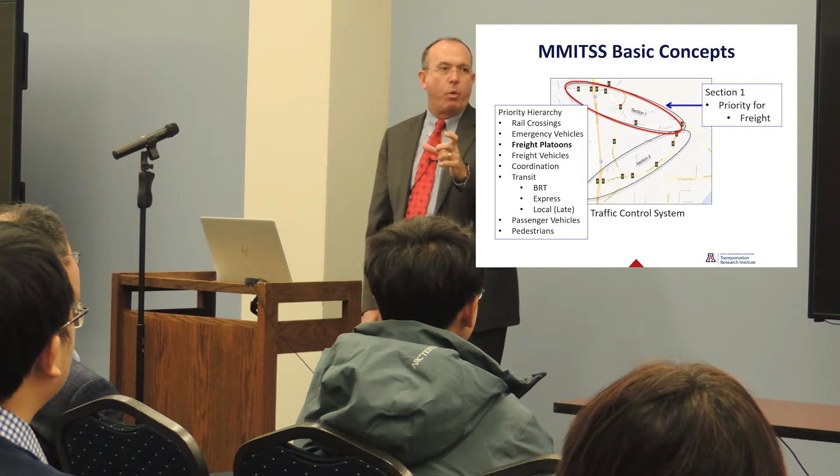I really care about my emergency vehicles getting to where they're going safely and quickly, but in this corridor I have a lot of warehouses and I'm going to move a bunch of freight through there. Maybe I'm going to move it as platoons or maybe as vehicles, right? But I want you to give preferential treatment to them at the traffic signals, and then maybe I want you to coordinate the signals, and then we have a little bit of transit that goes through there because people come and go to work at certain times of the day and we want them to use the transit, and then passenger vehicles, and we don't have many pedestrians.

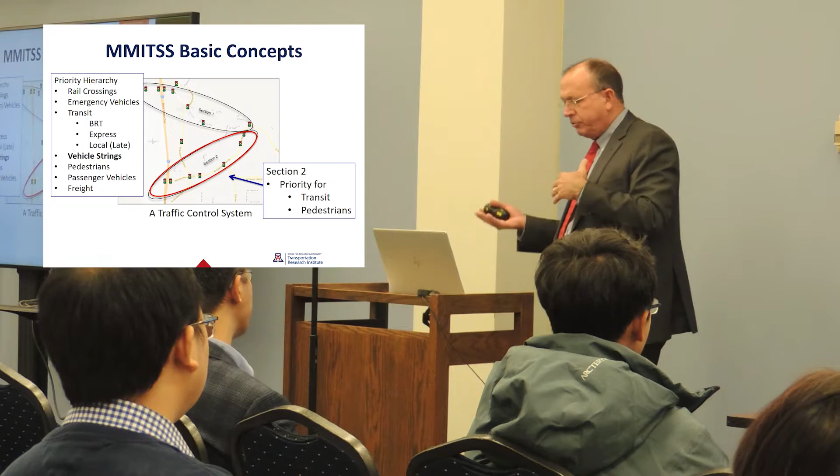But this other section on the other side, maybe this is where there's lots of shopping and schools and activities where there's lots of pedestrians and transit, and we really want to make it a travel-friendly environment, somewhere where they feel comfortable hopping on a bus and going a few blocks and getting off, and so the pedestrians and transit, and maybe we want to favor BRT at certain times of the day, and maybe if there's groups of vehicles that get together in strings, we want them to flow through the signals, because we could adapt the signals to do that, and then maybe pedestrians and passenger vehicles, and finally freight. So we can change the order of the hierarchy that's there.

And the other thing that's really important in the connected vehicle world, and you guys see this here all the time, is we can finally measure performance in ways we've never thought of, right? And we can do all the traditional things, volume, delay, travel time, throughput, stops, and such. Those are all exciting. We can do it by mode, by movement. So if we have a heavy movement of trucks making a left turn and their flow rate is pretty slow, we can actually assess that that's going on. That would impact how much time we want to give that phase, all right?

So first of all, use connected vehicle data. So we do that, basic safety messages, MAP, signal request message, signal status message, and SPaT data. Then do things that you did with adaptive control that's called ISIG. So go back to the RT-TRACS program and the RHODES and OPAC and COP algorithm that you guys are studying, and use those. And Yiheng, a shout out to you, he really modified the COP algorithm to work for 8-phase intersections or more general intersections.

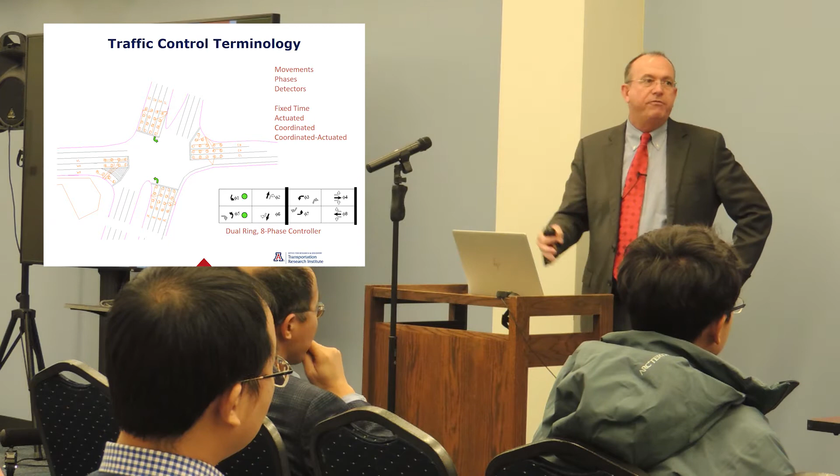There's a barrier down the middle that says you can't cross the barrier unless both rings go at the same time because you're moving to the conflicting phases of traffic. So we're going to jump the barrier and go to the left turns that are on the other side. We're going to time those phases for a while for whatever reason. Maybe one of them moves on and maybe the other one moves on. And then we're going to repeat the process all over again.

And that's really the core of how a traffic signal works. There's lots of things related to coordination and other stuff that go on top of it. But if you understand this part, the core is really there.

Each one of the phases has a few complications. First of all, there's a minimum green time. Traffic engineers don't like short mins. This is what happens if you have a really short min: you turn the light green, 2 seconds later you turn it yellow, and one car gets rear-ended by the other. Right? Because the one car says, yellow, I can stop, I barely started moving. So we have to have a certain amount of minimum green time for safety.

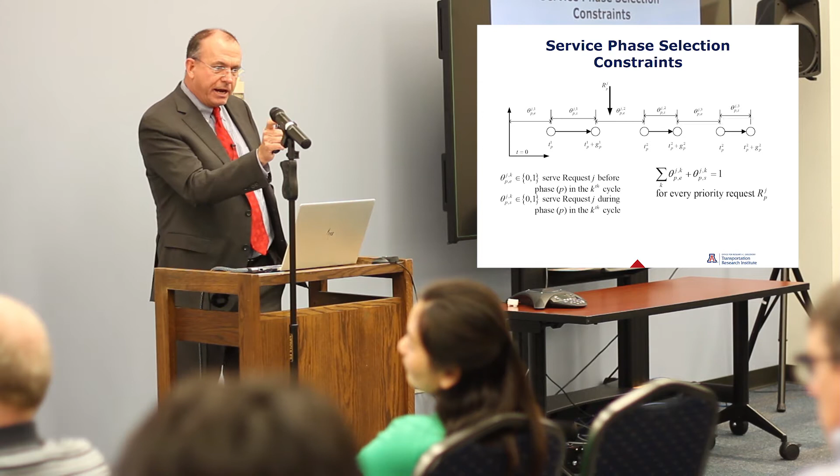Service phase selection constraints are a little bit harder because this is a logic. This says I'm going to serve this in the first cycle. So there's a bunch of theta variables, and then there's a bunch of circles with arrows between them. And those circles with arrows are, say, that phase 8 from before. I could serve it in this cycle. I could serve it in the next cycle. I could maybe serve it in the third cycle. What's best? Remember, I'm going to stretch and compress, and those are the intervals that I'm interested in.

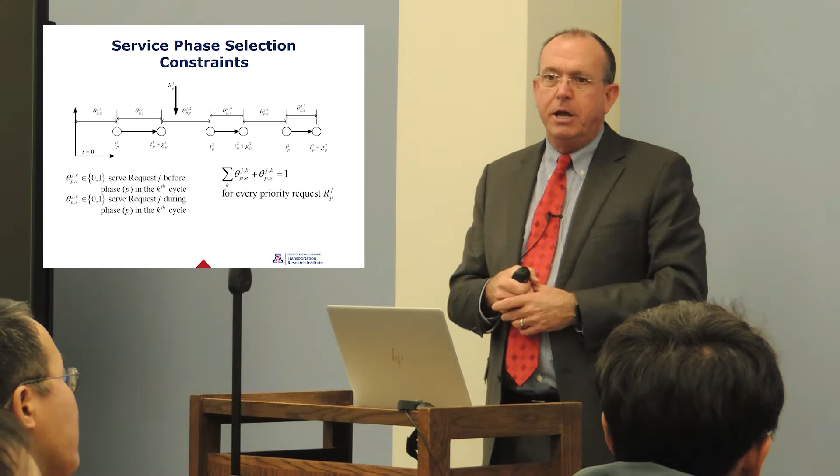And so there's that request, that arrow pointing down, which one of these places am I going to assign it to? And so the cycle service selection becomes important, and we can write those down using some OR tricks that we learn in optimization class with some decision variables.

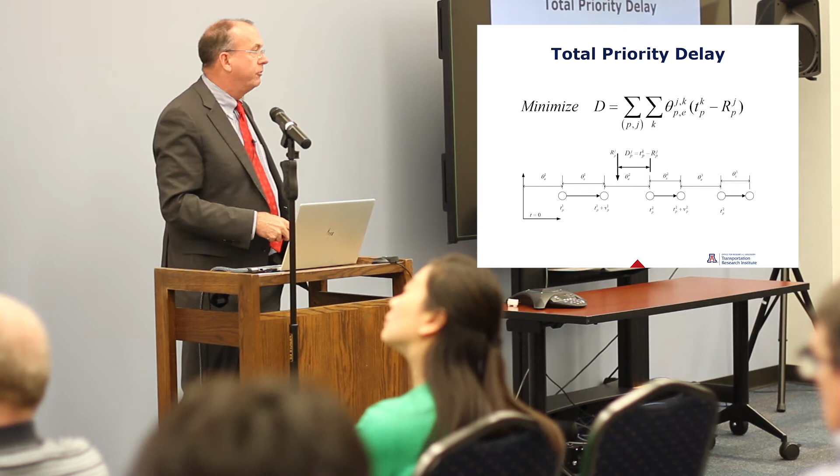And then the objective function looks really nice because if I'm going to serve that request in the second cycle, as I've shown on the diagram on the bottom, that's how much delay it'll have. So the theta times the time between when the phase starts and when the request is gives me how much delay there is. And all the OR people in the room are going to go, oh my God, it's a nonlinear integer programming problem. It is. I never got too concerned about it because there's not many decision variables.

He came in and said, yeah, your model's all right, the precedence stuff's fine, but I'm just going to rewrite this in a really nice compact math programming framework that is a linear integer programming problem. Now we can stick it into a solver and we can get an answer really quick. We get answers in a few hundred milliseconds to this problem. Not a very big problem, okay? So I can't go to NSF and get a ton of funding for a huge problem because it's not that big.

Okay, so I just want to talk a little bit about the solution to this problem. So when we finally get a solution, it's pretty complex, we call it a schedule. And it tells us what we want to tell the traffic signal controller to do. We still want to serve all the vehicles that are out there. We want to give the traffic controller as much flexibility as we can, but understanding the timing is really important.

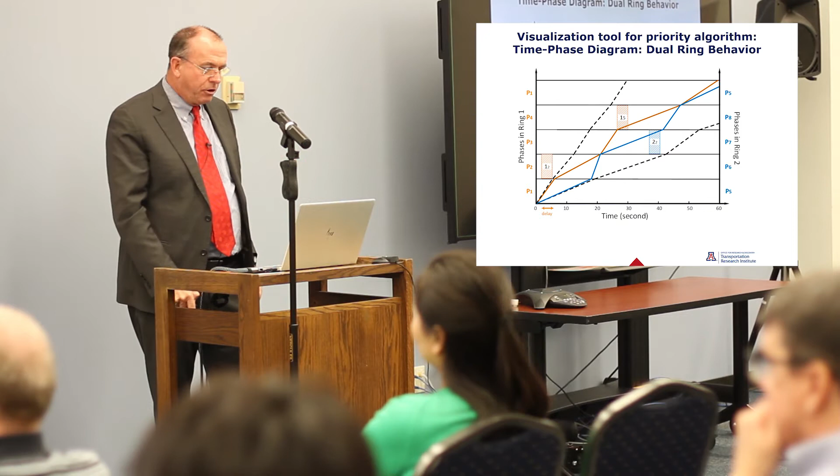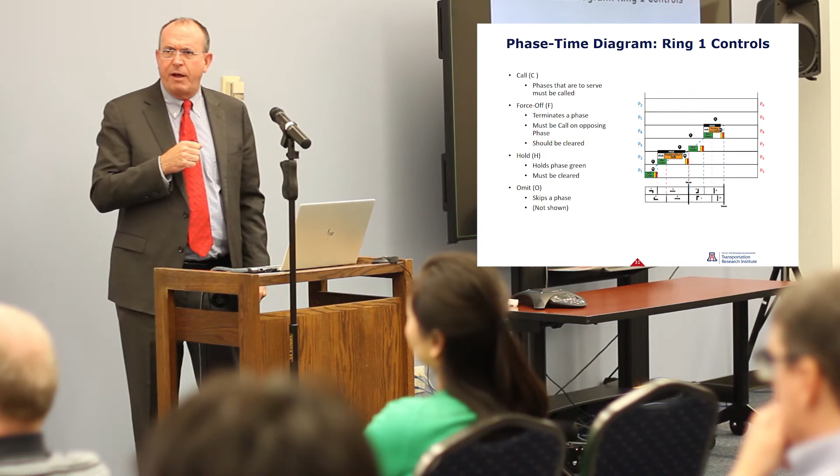Here's a really complex diagram that says with the minimum green times, the yellow and the red, here's where I have to apply holds and force-offs to make the controller do what I want. Now, sometimes traffic engineers get really nervous. They go, you're going to apply holds and force-offs to my controller? Yeah, just like the other equipment you buy and stick in your cabinet does. We just do it through software. I'm not going to tickle the pins and do things in the cabinet, okay? But this lets me realize the timing of that phase.

So, okay, how am I doing?

Okay. So, take that sort of new framework where we can put together different priorities under different hierarchies with the real structure for what's going to happen at an intersection, and then think about how I might want to assess performance. And so I talked about this earlier, sort of the classical measures that are out there, the local measures that are out there. Right?

We need to start doing performance assessment on a bigger scale, not just looking at what happens at an intersection then adding them up. I have to actually confess that over like 20 years, I thought that was the right thing to do. Volume weighted delay was the measure for the network. Turns out not a good measure. Right? We need to look at time in system, and we can get that with connected vehicles. But I'm going to talk about smoothness because I'm more interested in that. And it's funny, this morning in one of the demos, somebody talked about smoothness. And I like this measure a lot.

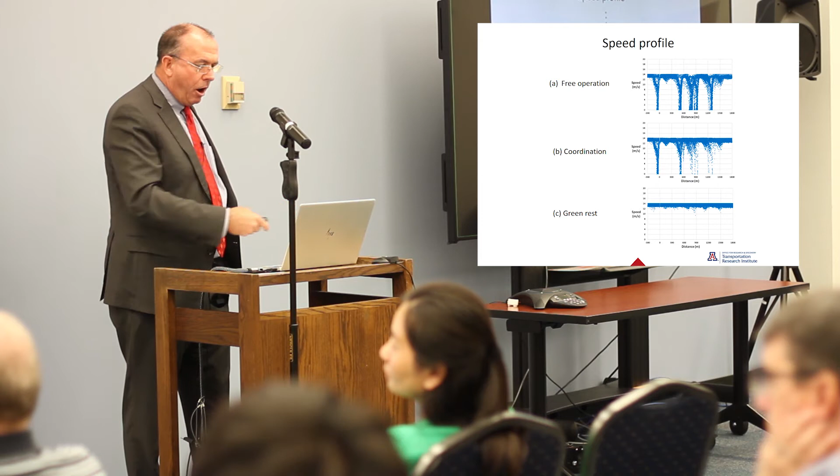Okay, so now how could I quantify what's there? Well, if I take the trajectories of each vehicle and I compute its FFT and compute the SOFT measure, the ratio of energy between the two, 100 times 1 minus the square root of whatever it is, okay? And then I plot those, you can look on the top, in the middle, and on the bottom. The average values are on there, it's just too small. 73 on the top, the average value in the middle is 89, and 99 on the bottom.

So we know that coordinated flow is better than actuated flow along the main street, and we know that resting in green would be really good. So the SOFT measure correlates with what we think is better flow of traffic.

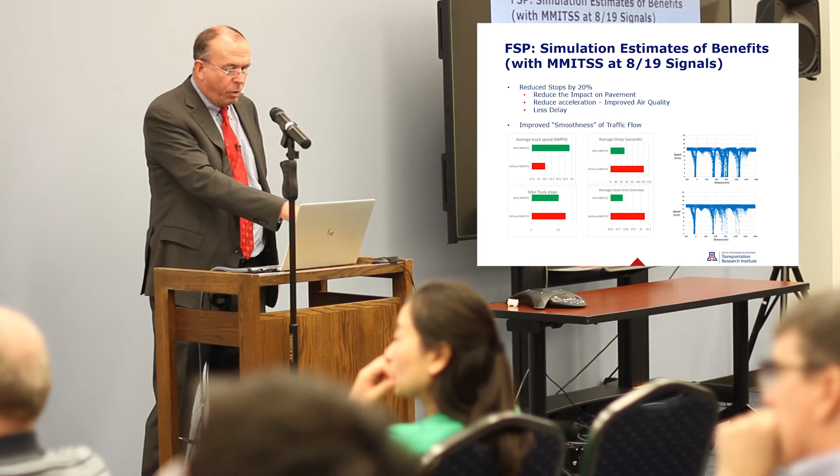So this is a simulation of that specific corridor looking at the measure of smoothness, and the graph over on the right really tells you that we have a little trouble getting started, but once we get into the flow of the system, we can really smooth out the flow, right? And I think that this is the kind of thing that we need to be thinking of in traffic signals.

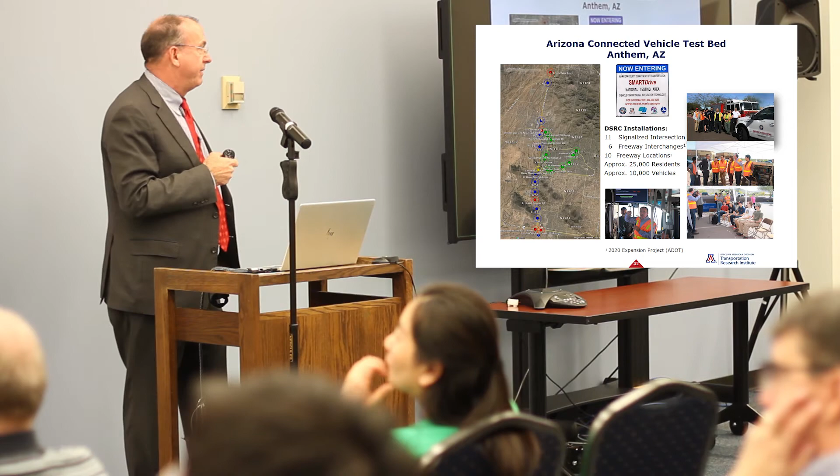So we have a test bed in Anthem, Arizona. The green dots that are in the middle are the ones that are operational. We have 11 traffic signals in our test bed. I used to say it's like M-City but out in the real world. I can't say that anymore. You guys have so many good things going on in M-City with the millimeter wave communication, the automated vehicle, the railroad crossing and everything that's there, but we're live traffic.

Right? We have those things out there called human drivers and pedestrians and bicyclists that live in the neighborhood. There's about 25,000 people that live there, 10,000 registered vehicles. It's a walled-in living community. They have to go through our signals. So my goal is still to get 2,000 or 3,000 of them equipped with DSRC. We don't have that many. We're adding some signals up and down I-17, hopefully this year.

So one of the big challenges that we've had is getting enough connected vehicles. So we recently have a relationship with this company, NoTraffic, which Henry, you said you had met them. And what NoTraffic is doing is using video radar sensors to track the vehicles. And I'll play this video for you. This is their promotional video. And what they're able to do is they identify the vehicles and they track them, and they send us BSM data. So I went from 0% market penetration to really high market penetration in no time.

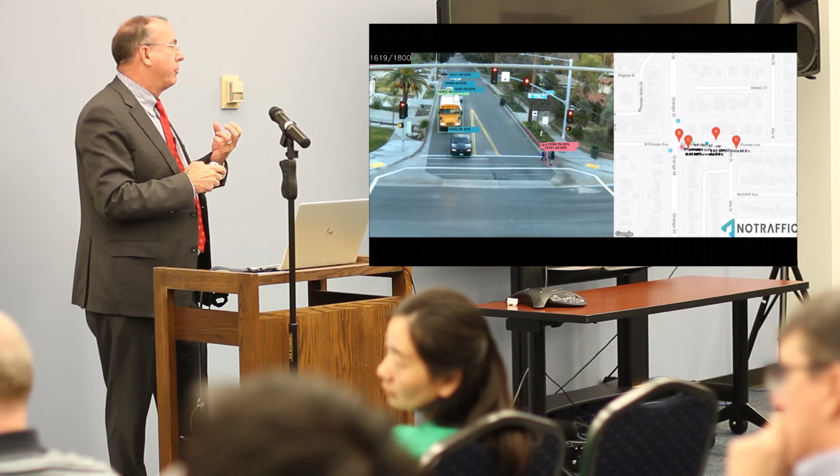So they equipped 3 of our intersections in Anthem. So I'm going to have a chance to, first of all, find out how good they are at detecting the vehicles and tracking them and the pedestrians that are walking across the street here, and drive our algorithms that we've developed while we're waiting for the vehicles to come.

Second project I want to talk about is the Connected Vehicle Work Zone. This is a project that was funded by the Federal Motor Carrier Safety Administration. And the idea is, can we use connected vehicle technology in work zones to make it safer for freight vehicles? Most of the accidents in work zones involve freight vehicles, like 500 and some deaths a year or something. I don't have the statistics right off the top of my head.

But the idea is that as a truck is planning its route, they could be informed about a work zone. When they get close to it, they could be made aware of it. And then when they're entering and driving through it, they could be warned about the work zone. And so really an important part of the work zone, and thanks to CAMP and the work you guys did with the map tool, gave us the ability to develop the map. I was struggling with how we were going to develop a map, especially when the traditional map wasn't really made for doing this kind of work.